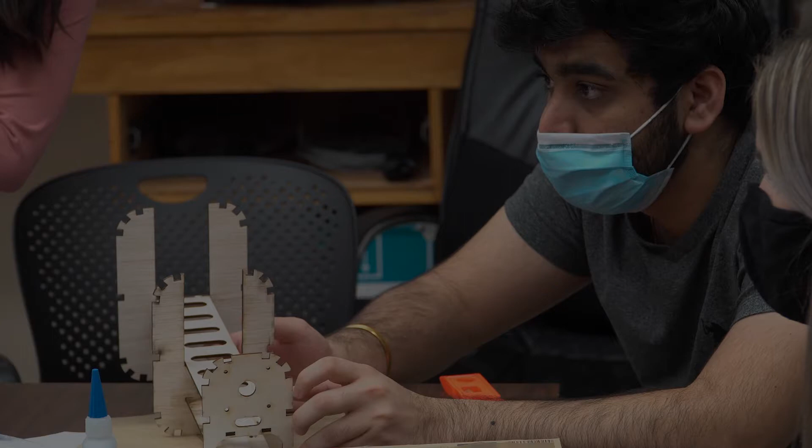Hello, my name is Timothy Hansen. I am representing the UMass Amherst UAV team. This is our entrant to the 2021 AIAA Design Build Fly competition. Our plane's name is Bad Attitude. This is our plane Bad Attitude and some of the team members before one of our test flights.

First section is Airframe Design. The goal of this aircraft was to create a well-rounded, cargo-carrying, but fast aircraft that could perform well in all aspects of the competition. On the right, you can see some of the headline figures: our wingspan, length, wing taper ratios, and our weight.

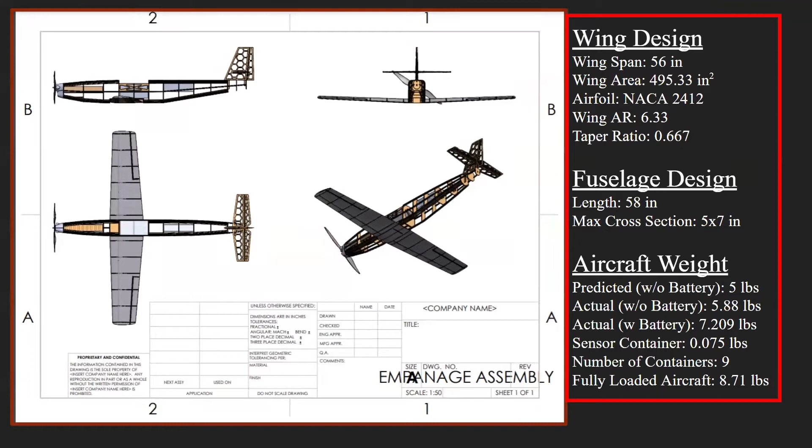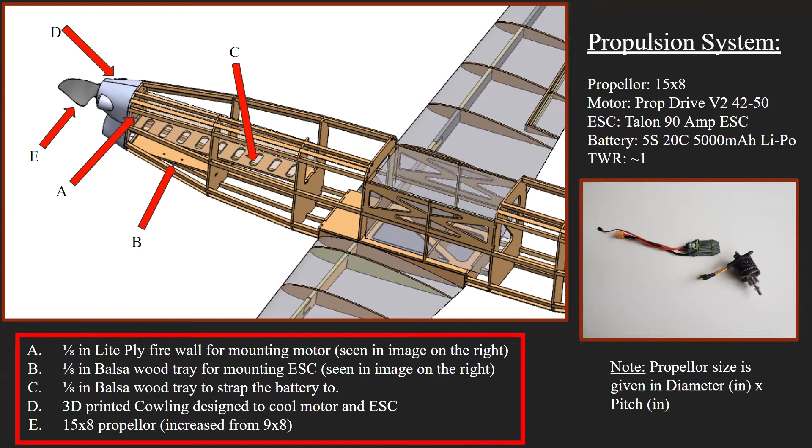Here's Bad Attitude in the flesh. Here's our propulsion systems layout. As I just mentioned, we were using a 15x8 prop. The prop size is given in diameter in inches. On the left, you can see a CAD drawing labeled with a few key points of our propulsion layout.

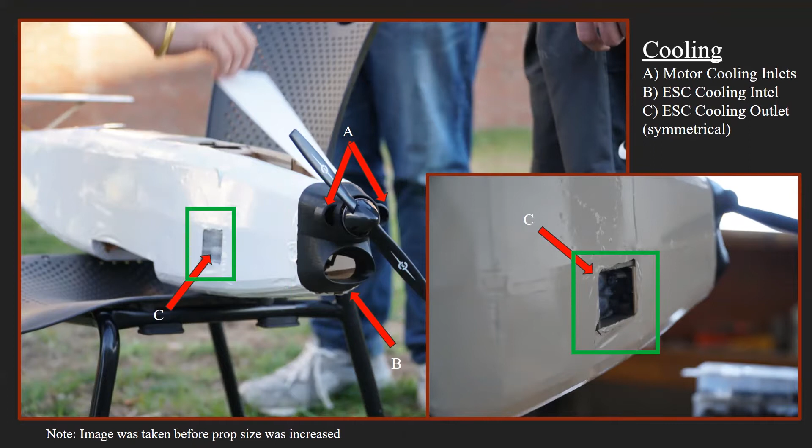Here is a detailed view of our cooling solutions for the propulsion system. As you can see, we have inlets for cooling the motor and also inlets for cooling the ESC, which is most important. We also have outlets on either side of the fuselage to allow the air to flow out from the ESC inlet. Here's a better view of it when you're looking straight down.

Here's our control architecture. Our control surface layout has a few main control surfaces: ailerons, slotted flaps, elevators, and vertical stabilizers. We also had landing gear and throttles, so that took up all 6 of our channels on our RC receiver.

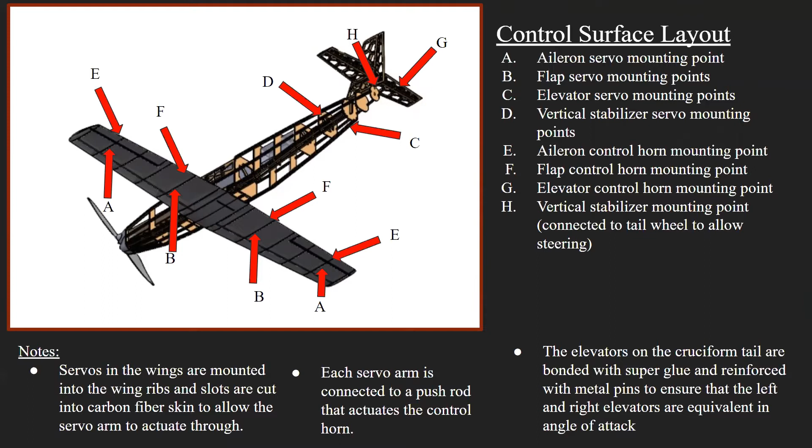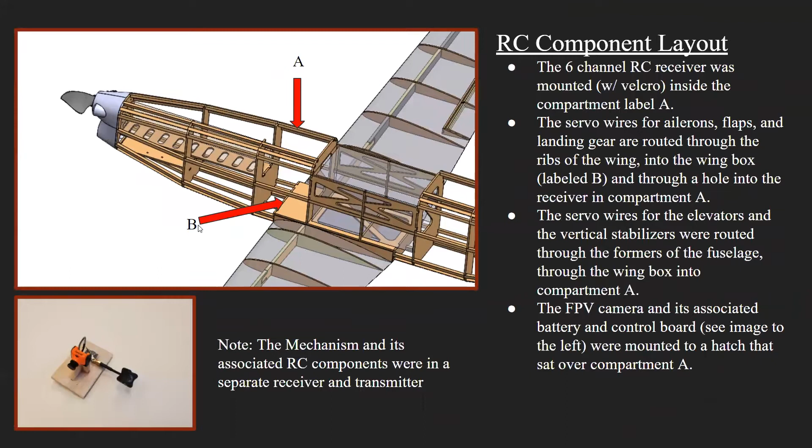Our RC component layout was fairly simple. We had it all contained into one compartment area just after the battery storage. The receiver is Velcroed in and then connected to the battery, which sat on the tray. The entire compartment was covered with a hatch that had an FPV camera mounted on it.

Here's the mechanism RC. Now, the RC for the mechanism and the plane itself were on 2 different receiver and transmitter setups. The receiver for the mechanism was actually mounted after the wing box next to the mechanism RC, and it used the PWM outputs from the RC receiver that it got from the transmitter as inputs for the Arduino. The Arduino had code on it that would put outputs for the motor and for the lights on the sensor through the slip ring you can see attached to the mechanism, and then the servo door that would open and close during flight to allow the sensor to drop out.

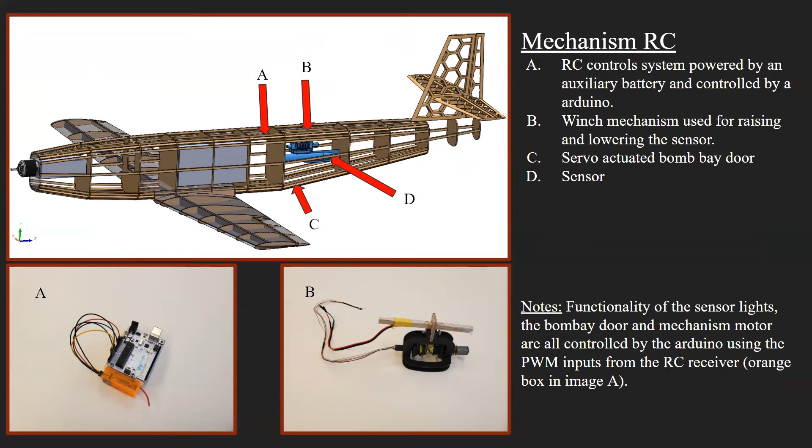Now, our sensitivity study was a key component of our design process. Two key factors we really looked at were the airfoil choice and the wing area. We used XFLR5 to find the coefficient of lift and critical angle of attack, and then in our MATLAB code, we varied our wing area.

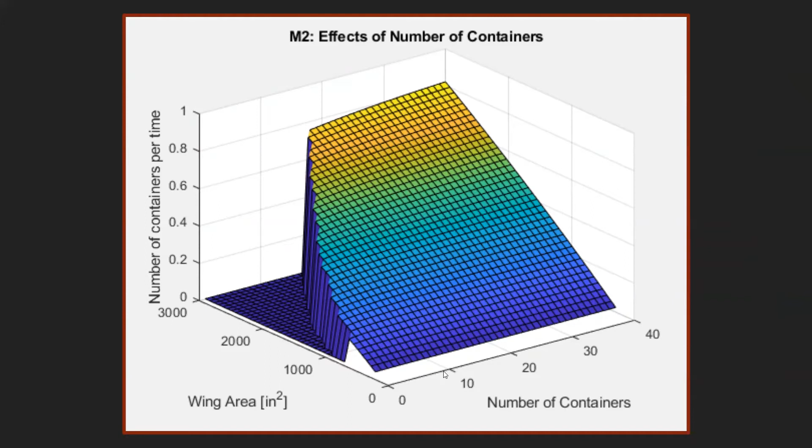Now this graph is our wing area varied by number of containers and number of containers per time. Number of containers per time is a rough estimate of the lap time and the efficiency of the aircraft. So we went with a conservative estimate of 9 containers and a wing area of about 495.

A total number of laps from mission 3 about 20. Average cruise speed was going to be about 71 miles an hour. Mission 3 score, without being normalized over the maximum for the competition, would be about 7.99. And the combination of mission 2 and ground mission would be about 1.123.